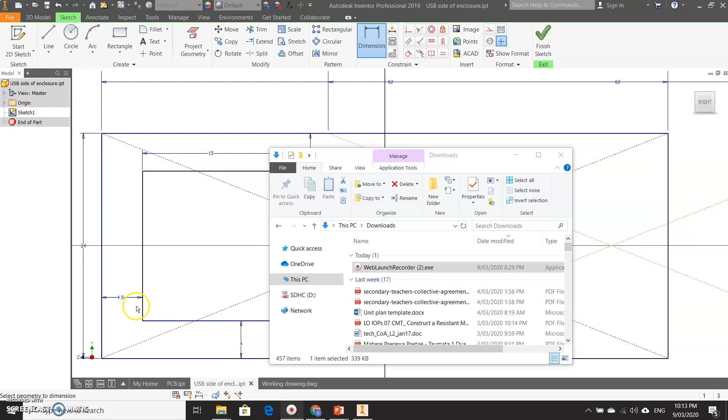Yeah, the last video cut a little bit short on us. Okay, let's get straight back into it.

So I just double checked to make sure that measurement was 5, and it is. We'll move on from there now.

So we've got these two boxes drawn in the middle of our screen. The next thing we need to do is figure out what's going on with the next part of our drawing. For that side we need to draw a box that's 15 by 13.5. The dimension in between those two is 3. You may need to double check these measurements against your own drawings. We'll press OK. So 3 millimeters in between, and it's 15 by 13.5.

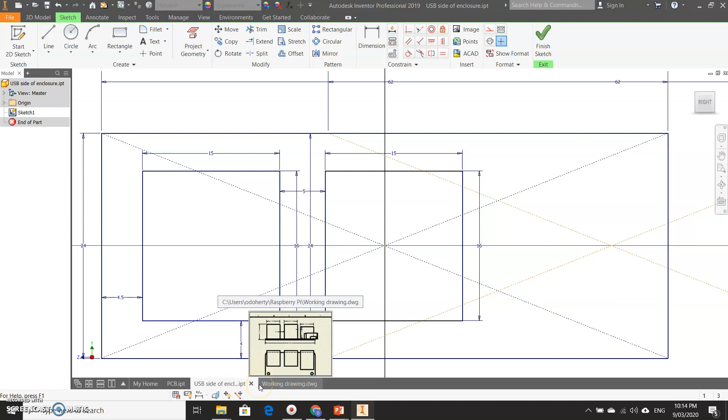So back into this drawing. Again, you can flick through these by clicking Control Tab, so you can click between all of the pages you've got open that you've just drawn. That can be quite handy, Control and Tab at the same time. Now, anyway, back into what we're doing.

So we need another rectangle, and it's going to be in line with this one. Notice what I've done: I dragged my mouse down, and when you see this broken line appear, that will keep it in line with the corner of the rectangle to the left. So I'll click here and just drag up a rectangle.

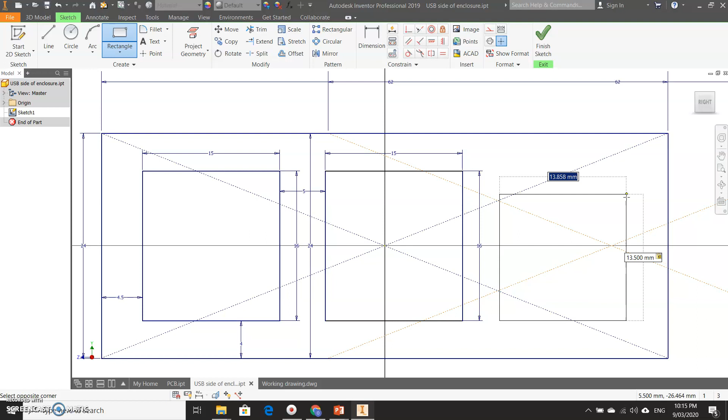I know that it's going to be 13.5 there. I'll press tab on my keyboard and type in 15, press enter, and I know the dimension between these two parts is about 3 millimeters, and press enter.

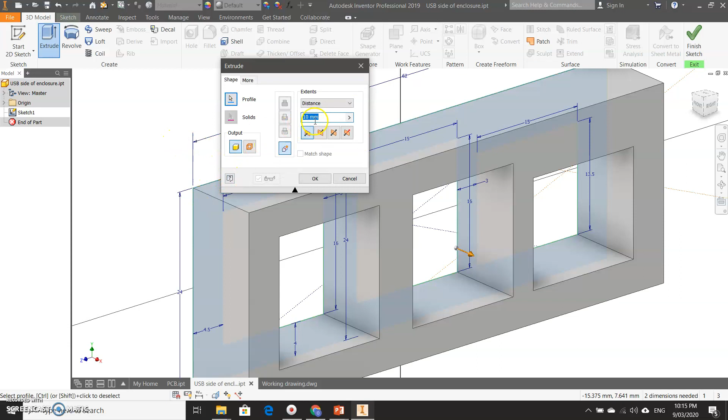Now I've done that, I'll go to 3D model, click on extrude, and type in number 3, as in it's going to be 3 millimeters thick for the material. Now, great, that looks good.

Now the first problem we need to resolve is how we actually enclose this. We've got two pieces, a piece of wood or acrylic or whatever material you make it out of, coming from this side and from this side, at the top and at the bottom, and how they're actually going to join together.

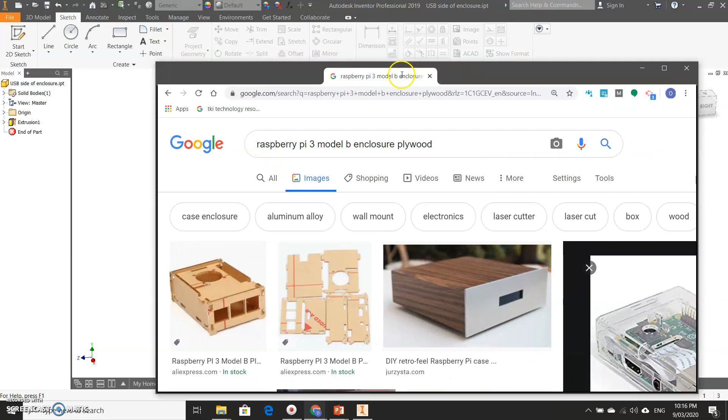So we can do things like finger joints and all that good stuff, and I'll see if I can find one that's got finger joints to explain how they work on this page. In essence those are like finger joints there - it allows one piece of material with one section cut out to allow the other one to fall into place.

Okay, so we can do things like that, or we can glue one just flat onto the top of the other, or we don't even need that many tabs - we could just have one here and maybe one at the far side. Quite handy. So it's up to you really, it's your drawing, you can design it whatever way you like.

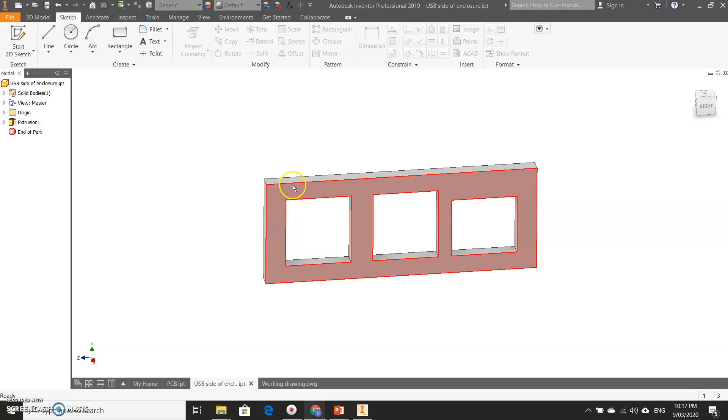Okay, but in the meantime, before we really get into the nitty gritty of all that, let's just get the basic dimensions correct for what we need to do. So I've done a measurement to allow 3 millimeters to come in on either side here. I'm going to look at the side view now of this drawing, looking in at the side here this way.

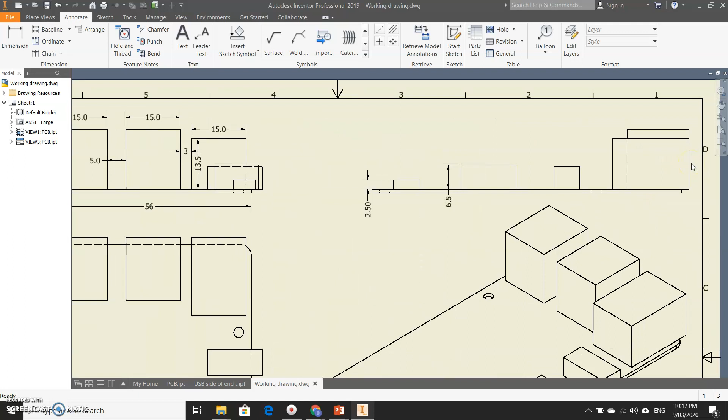I am going to use the dimension tool, and usually if I click on a line it'll give me the dimension of the whole line. However, there looks to be a break here - a break in that line, and it's most likely because, over on this side, of the center of the circle. But there's a way around that.

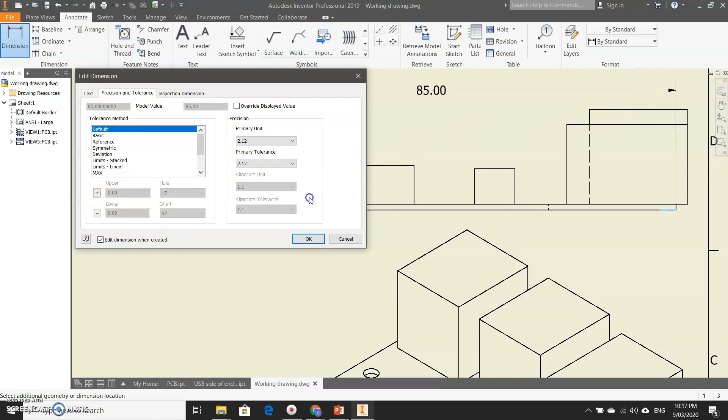We can move our mouse over to here, click on the green ball on that side, click on the green ball on that side, and it tells us that it's 85. So 85 is the dimension there. That's good to know.

Now we need 85 plus 3 millimeters here - 3 millimeters for the material on that side, 3 millimeters for the material on that side. Now anyone with a keen or analytic brain will ask why I'm adding 3 millimeters, since you've already added 3 on the side here and you're thinking about butting it up to it. Well, not necessarily - if we actually decide to cut a little tab into that bit of material, we will need to have 3 millimeters of an overhang here.

I'm basically talking about the finger joints or the little tabs that I showed you when I brought in the web browser. So I'm adding 3mm to 85 for this side, and another 3mm to 85 for this side. So 6 plus the 85 in total. That's where I'm going with it.

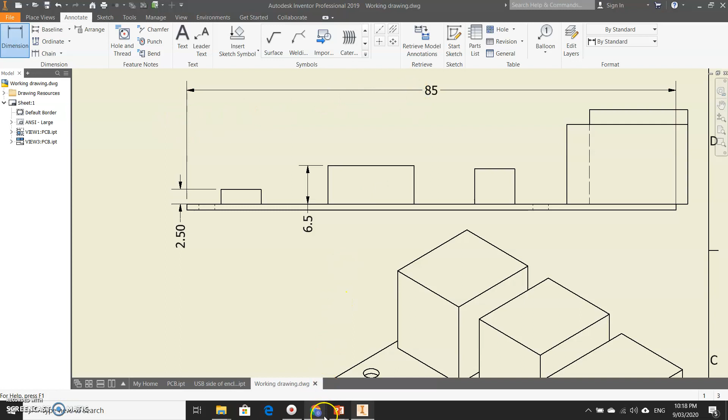Alright, so the first thing we do is we save that. That drawing there is correct. We go new, metric, standard create, into a new part.

We're going to go and save this part first of all, and we're going to give it a name. So this is going to be the HDMI side, isn't it? HDMI side of Enclosure. Press save.

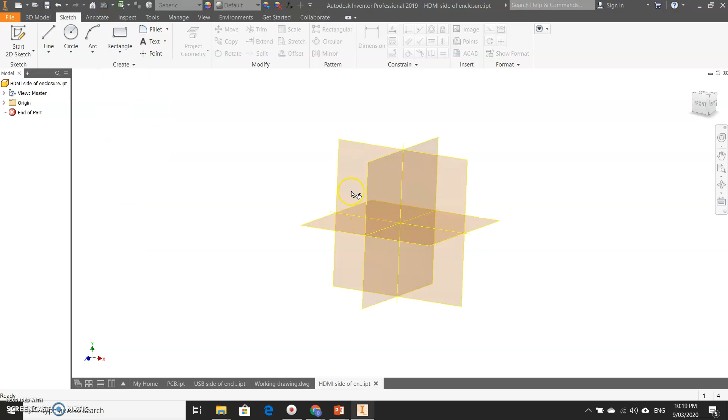Sketch. 2-point center rectangle, clicking on the other side. I'm going to draw out a rectangle that is 85 plus 6. Press enter. And I didn't type in the height.

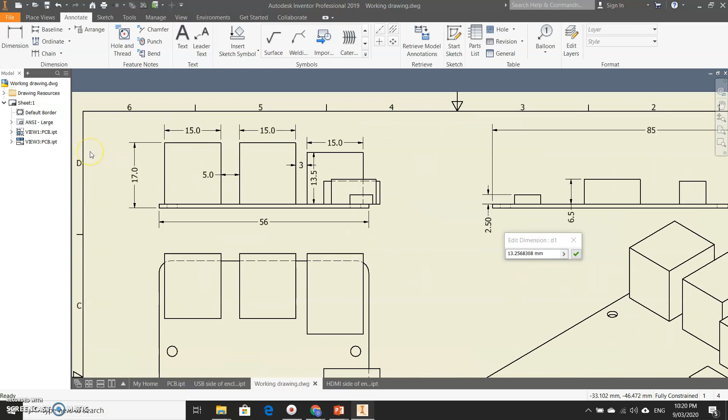So the height needs to be, I believe it was 17. We added on 1 for the solder on the bottom, and we added on another 3 plus another 3. So let's do that with this one as well. So we type in here 17 plus 1 plus 3 plus 3. Press enter. Brings us up to 24.

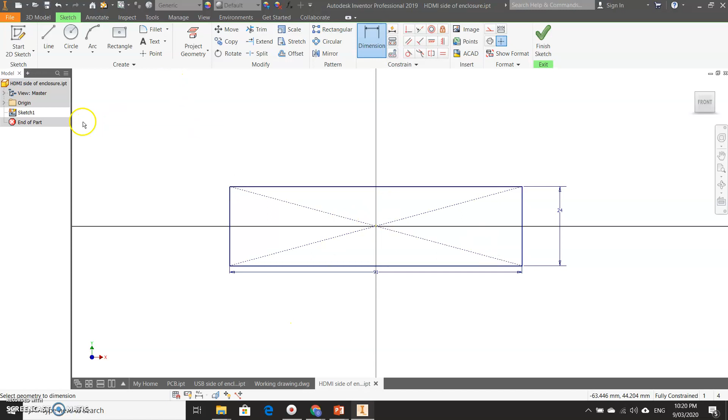And again, we are going to use these little rectangles and drop them in here. So I'm going to just drop a rectangle in there, roughly around about that size there. And I am going to get my little drawing open on my other screen. Or sorry, I can show you on this one here. That's what we're using now to base everything off.

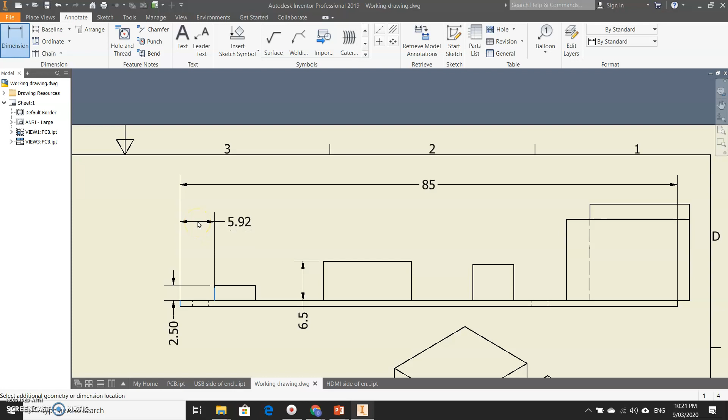So the height is 2.5, and it's going to be up 3 plus the 1 for the solder plus the 1 for the PCB, which brings us to 5. So 5 up from the base, and the distance from there in from the side is 5.92. Wow. Let's just double check that. It's coming up as 5.92 in my drawing.

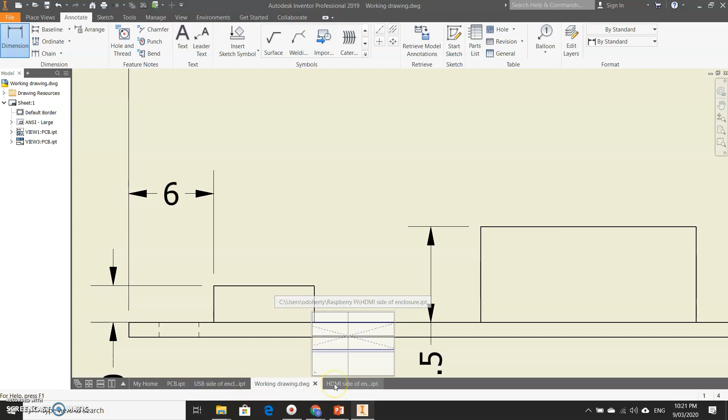You can correct that on your drawing, but I'm going to go with it at this stage to 6. Right, so 6. Bring it in from the side, 6mm. Right, so click on the edge, we click on the rectangle. We're going to go 6 plus the thickness of the material, which is 3. Press enter.

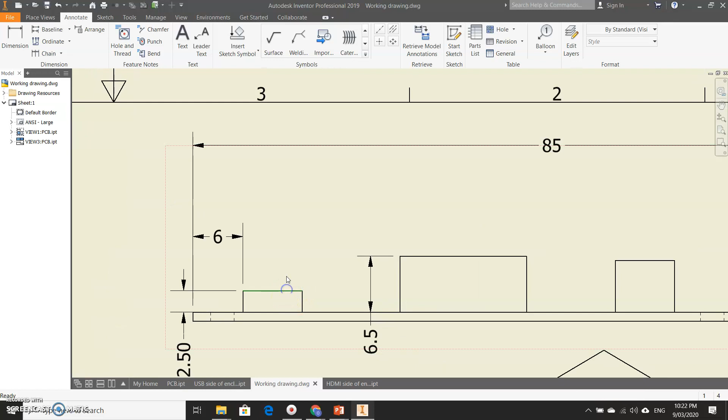The depth up from the base, we said that was going to be 5. Press enter. Now the height of that actual part is 2.5, and the width of it is 7. Okay, so into here, the dimension tool, click on the height, 2.5, enter, width is 7.

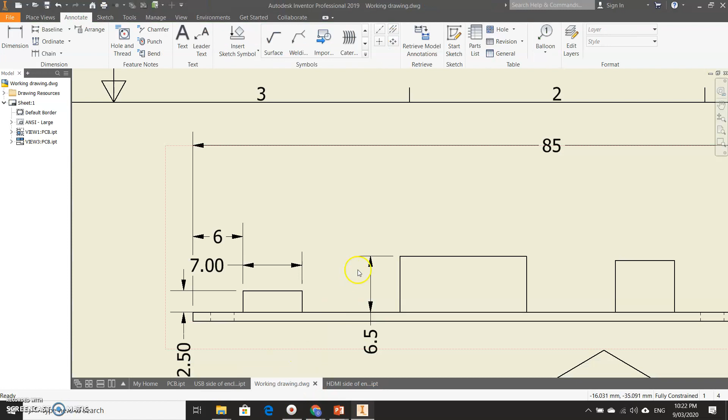Okay, into the next part. So this one is going to be a distance of 11.58 away. Now this is correct actually, now that I'm thinking it, because we've centered everything in our original drawing. So 11.58 away from this part here, or that side.

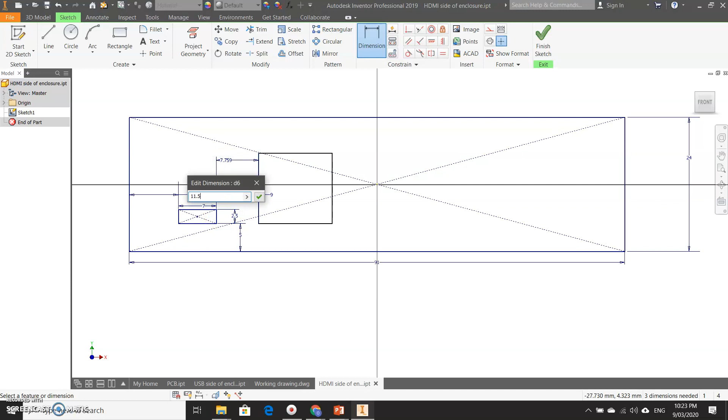2-point rectangle, in line with the base corner, drawing it up here somewhere. First dimension I'm going to do is 11.58. And then I'm going to worry about what size that actual rectangle is. So it's 6.5 in height, 15 wide.

Dimension, 6.5 in height, and 15 millimeters wide. Great. Into the next drawing.

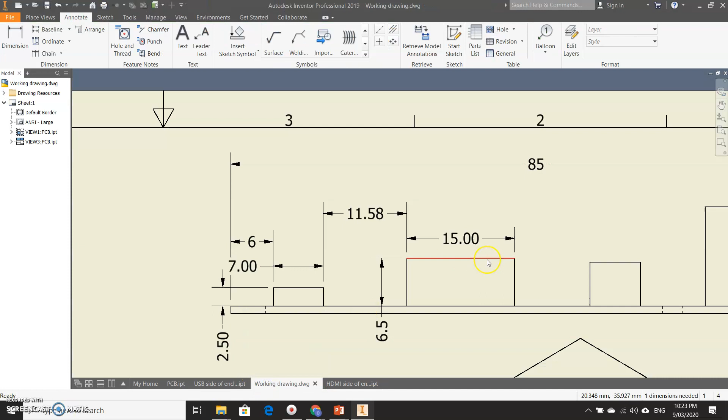And this one is spaced 10.5 away, with the width, width of 7. So 10.5 by 7.

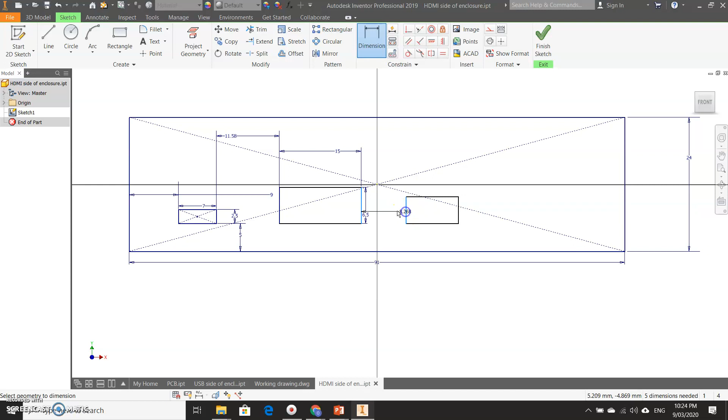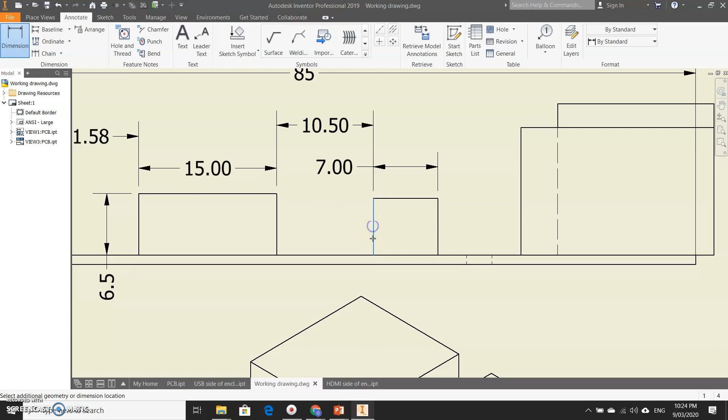Another rectangle, and on the horizontal. So a distance of 10.5 in there, and a width of 7. Now the width of that will confirm. The width was 7, and the height 6.6, I believe, isn't it? Going by memory. Yes.

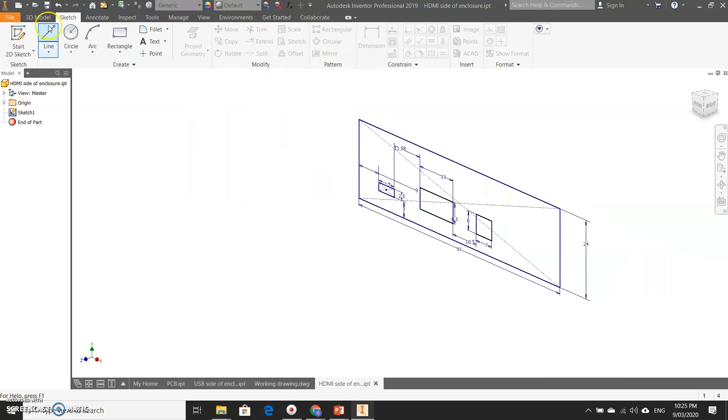So double click on the 7, that should be 6. Double click on there, and that should be 7. And we go to tick that, so finish that sketch. We're happy with that now. We go to 3D model, click on extrude, extrude that drawing, and that needs to be 3. We press OK, and there's one of the sides done. Now we press save. We're ready to move on to the next side. Brilliant.